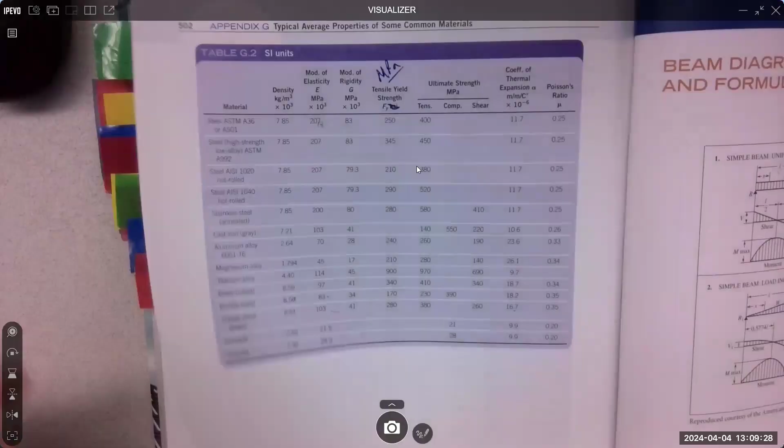There is SI units, don't mistake that, and then there's average properties of some common materials. And here they are, and there's concrete, and as Jorge said, there's 2 of them, but there's actually more than 2, there's 5 in total. There's 2 very common ones. And notice you won't get all the properties of concrete. What table is that? This is on page 502, average properties of some common materials.

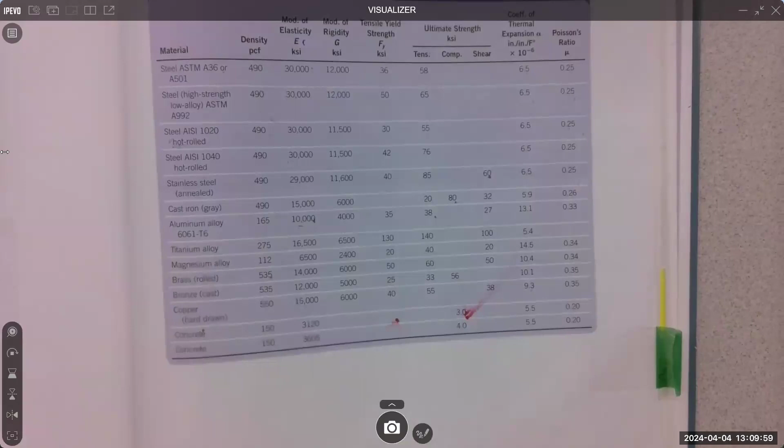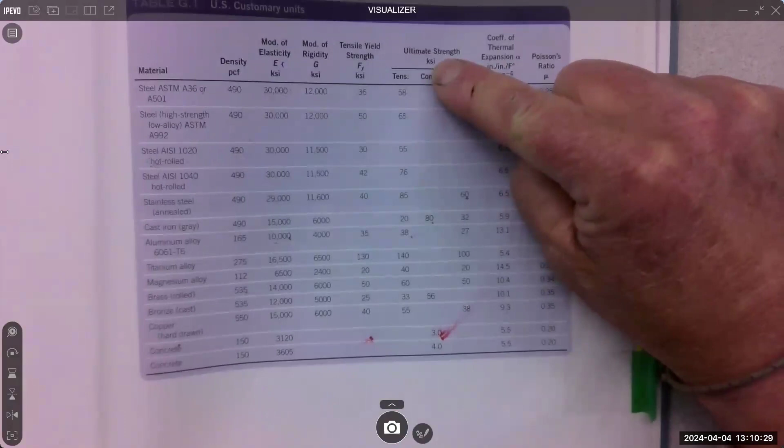The blood? No, it's highlighter. I don't think I'm bleeding yet today, but I bleed daily because that's just what I do.

Because I work with my hands, because working with your hands is good for your brain, just so you know. It can be on your truck, it can be on your car, it can be in your garden. I build, right? I'm building a golf platform for my dad.

Is there any proof to that, or is that just a saying? No, there's actually research that's proven. So you know who wrote the research? This is fascinating. A mechanical engineering PhD went out, worked 5 years in research, but was a motorcycle enthusiast, and finally gave up the PhD research to work with his hands and have a Harley Davidson shop. So he did research on how many people migrated from a high tech to a low hands-on type of job and what their rating on happiness was. He literally proved through some research, with statistics, which is always flaky, that you can be much happier if you find something you're super passionate about, but working with your hands is definitely beneficial.

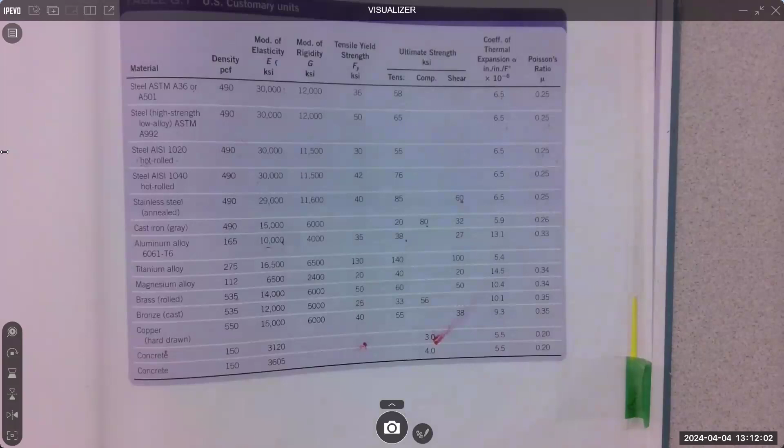I worked about 15 years as an aviation technician, and 20 plus on and off as a machinist. And I still have my 8 fingers, and my 2 thumbs. I haven't taken off a finger yet. All right, so anyway, back on task. Because I'm a machinist, they cut themselves. That's not blood, not blood, it's highlighter.

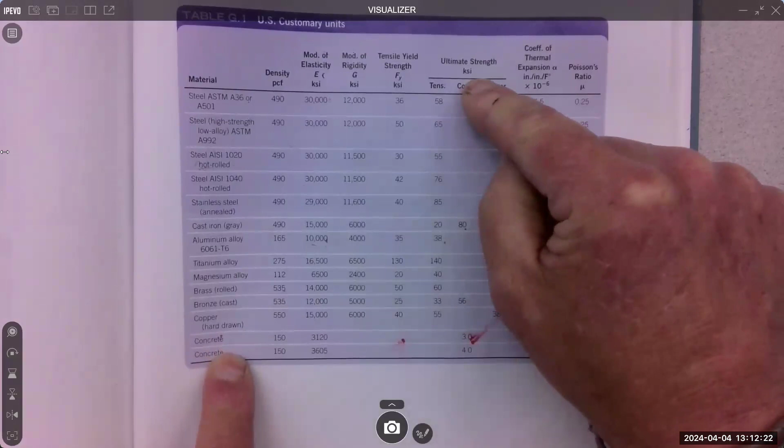But see, ultimate strength, standard concrete is 3 KSI. How much did you come up with? 4 KSI, so right at the limit of high strength concrete. But it'll hold, that's a lot of weight on a concrete cylinder, I think it was 6-inch, right? Yes, that is a lot of weight. Concrete's amazingly strong. All right, anyone else get 4 KSI? Yeah, okay.

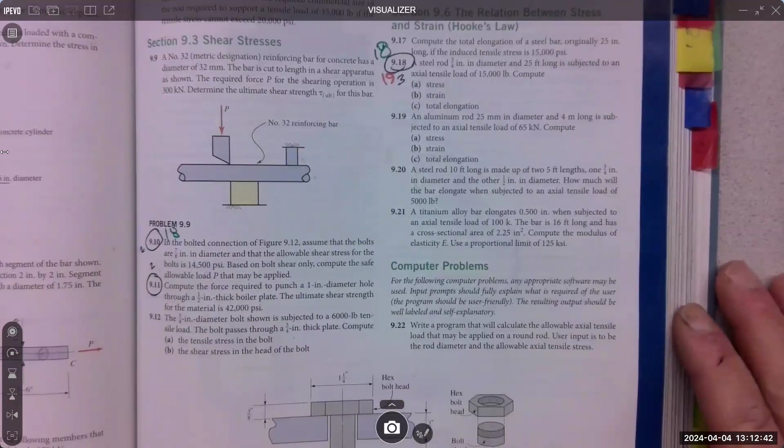What's this one called? BC. What'd you get in BC? 31.18 KSI. Anybody else? Yeah? And then what about in AB? 18.75 KSI. Yeah, and did they give us the material?

Looks terrible. They didn't give us material, so we can't check it. Then we're just calculating a stress for some academic purpose, and I despise that. I wish they would give us materials on everything, because then we could say, oh, that's a good stressor.

Oops, that's not gonna work. Okay, next one, they give us a steel bar. What type of steel? That's gonna be mild steel, but that's a great comment.

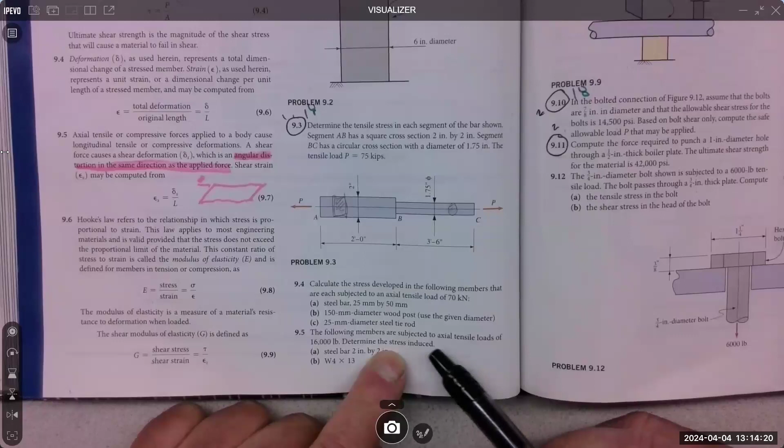So number 5, the following members are subject to actual axial tensile loads. Axial load, what's that mean? In line with the long axis. So we will do bi-axial stress, which means two axis. One will be axial, like that, and the other would be cross-section, or bi-axis.

Steel bar 25 by 50, and then a wood post, and then a steel tie rod. Wait, that's number 4. Darn, I like that one. I should do 4 next time.

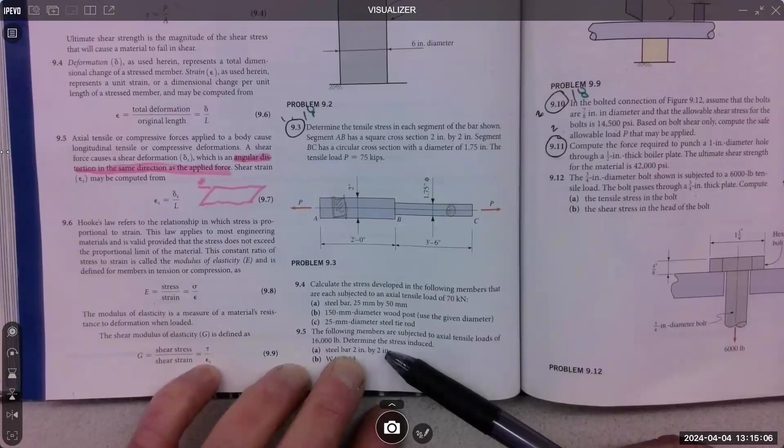Steel bar 2 by 2. What was that one? 4,000? Yep. Anyone remember the yield of mild steel? 36,000. So mild steel is called A36, and that stands for 36,000 yield. So if you're getting 4,000, we're like 9 times under the limit. That's good. What about the W4 by 13?

How'd you get the area? Look it up through the table. Yeah, go to the table, look it up. Nick said a different answer. It was close though. Okay, 4,000, perfect.

And W shapes are steel, typically mild steel, but they can be different steels. So if we don't know, like on a quiz, I'm going to tell you the material so you'll be able to compare it right away. But if the book doesn't tell you a specific kind of steel, then we just assume A36.

Question on the table itself, on the soft steel - it's also A36, but it said A501, what's that mean? So that 501 is another type of mild steel. It just has a different carbon content, but the same material properties. It might have different corrosion resistance, a little different surface finish, that kind of thing. But the properties are the same.

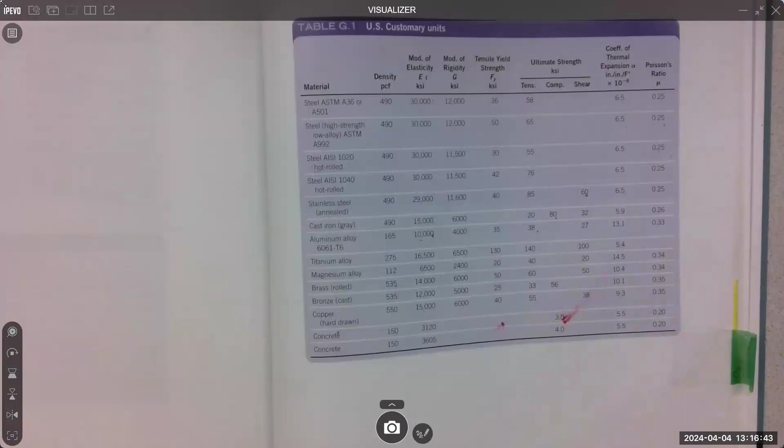And I think they give you high strength, yeah, and they give you stainless. They give you 1040, that's hot rolled. So those are the common steels that get used out there. And of course, there's a lot more - you can get any kind of steel you want.

All right, let's push forward. Wow, chapter 18, that's really pushing forward. Let's go back to chapter 9. All right, just a quick review.

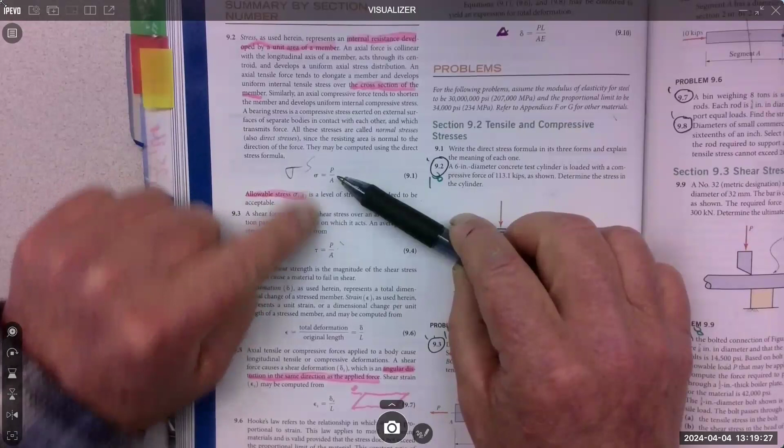Our stress equation, P over A. This is all kinds of tensile stresses, also called normal stresses or axial stresses. And then shear. We haven't done any work in shear yet, but you're gonna have a homework set in shear. Oh, I should show you that because it's a little deceiving, maybe confusing.

Let me look at it. Where does it say? Yeah, here's where you're gonna do it as a homework set, and it says in the bolted connection of figure 9.12. Figure 9.12 is in the chapter. You gotta go looking for it. So it's not anywhere here.

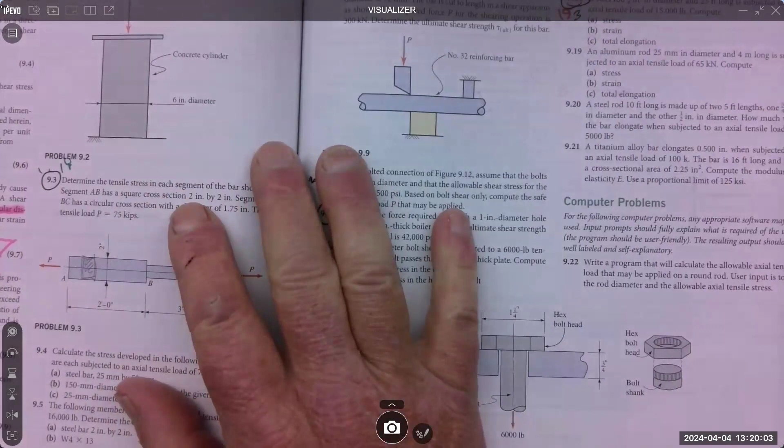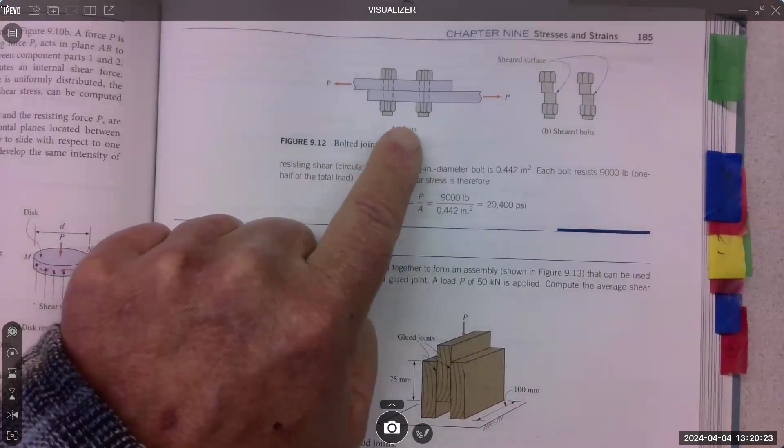Whenever they refer to a figure, that's like, oh, here's a figure, 9.21. Right, so we're looking for figure 9.12. Figure 9.14, figure 9.12 right here. So when the homework problem says go look at figure 9.12, that's figure 9.12.

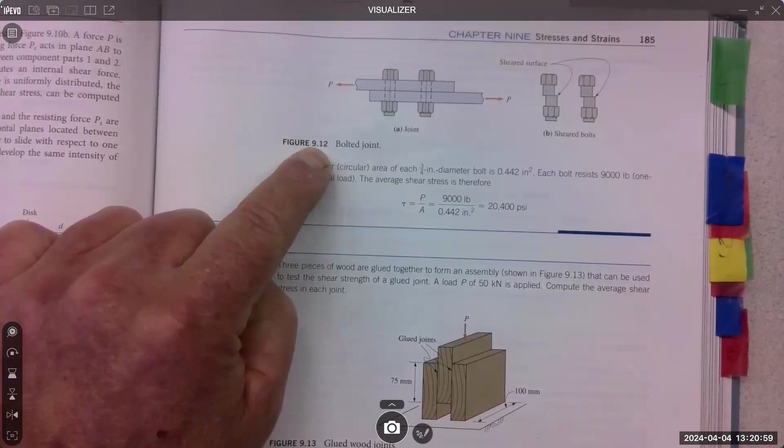Is yours different? What's yours say? Mine's right here. And that's figure 9.12? 9.12 up here, example. No, wait, no, no. Oh, you gotta find the one that says figure. Oh, I think that's it, go back a page. Yeah, that's why I'm showing you, because it's really weird. So when the book problem refers to a figure, you gotta go looking for it. Yeah, you're gonna need a picture of that, Ben.

So you're gonna do shear stress on this one, and they actually show you what we talked about last time. You have to think about what has to fail, and you have to use that area. So if it's a multiple bolted connection, every bolt's gotta fail. Like if it's a 10 bolt connection, all 10 bolts have to fail for this thing to be failed. So when you do your stress P over A, you're gonna include all the areas in shear.

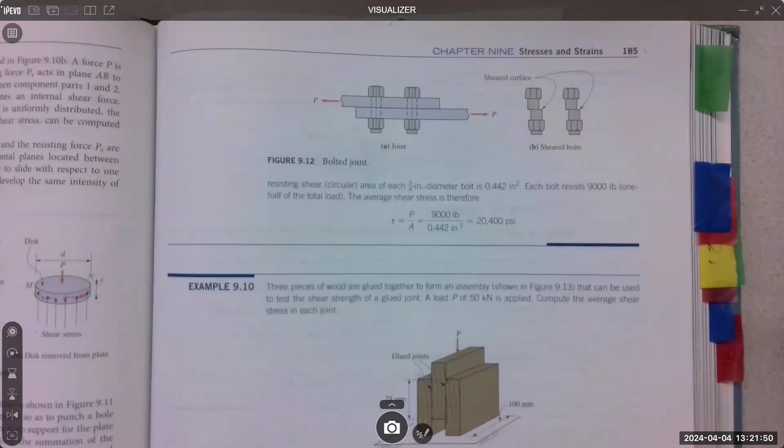So for this one, the plate, the bottom plate would go one way, the top plate would go the other, and it would have to take those two out. So you use the areas of those two bolts for your shear calculation. Okay, good, questions? I think you have a punch problem too.

So the problem with a punch problem is you have to again think about the area that's gonna fail. When you take a round punch and you send it through a material, you're trying to punch a hole, right? What has to fail? It's this outer ring that has to fail when you drive something through a piece of material. It's the circumference and it's the thickness of the material that has to fail. It's like a ring that you would put on a finger. It's that area. That makes sense?

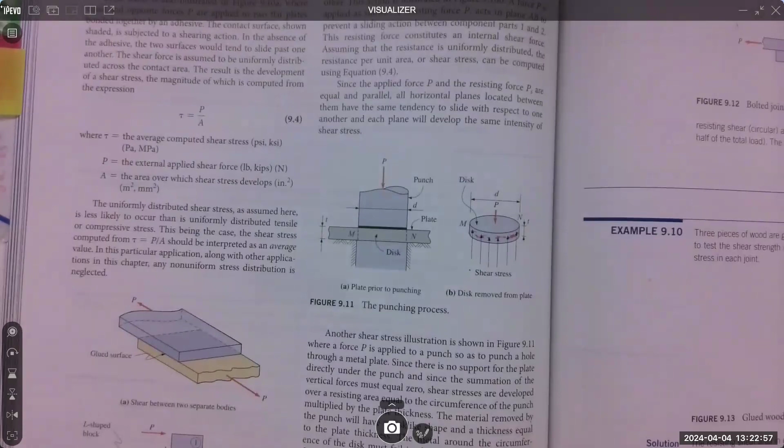Shear's a little different because you have to think about, oh, what area would fail, right? And in this case, with this punching down through this, it's this outer ring that would fail. So you have to calculate that. Circumference is 2 pi r times the thickness gives you the area. All right, good.

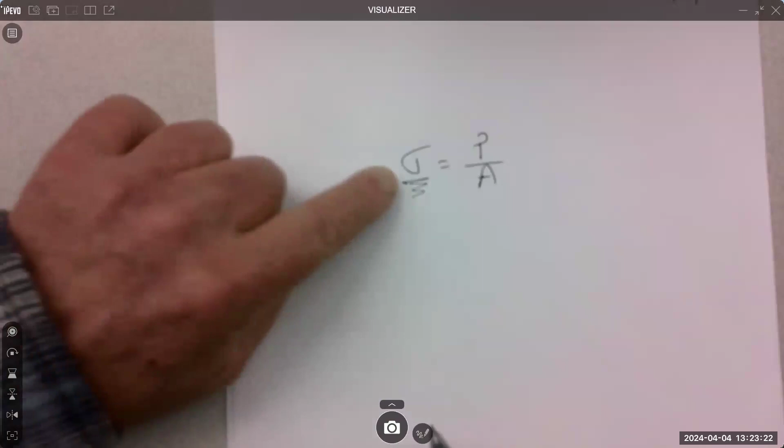Yes, it's this 11 one. And you're actually going to compute the force. So we did that last time too. If we have stress equal to P over A, and they give us a material property, they say, hey, this is steel, and it'll actually fail at 40,000 PSI, right? Then we know this.

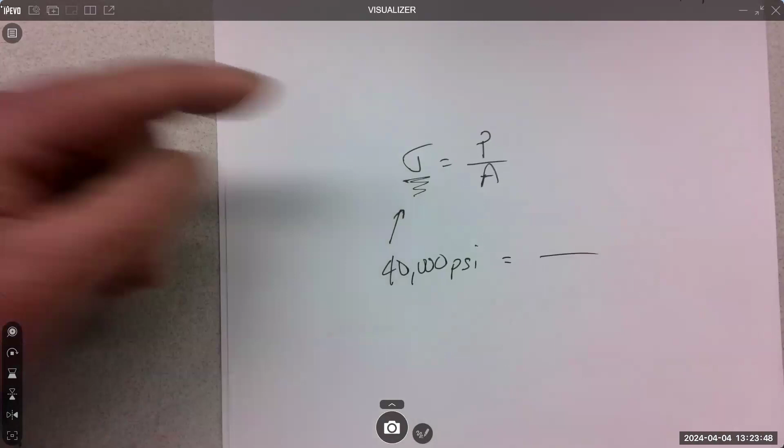So the problem says the material, we can look up the failure stress, or they give us the failure stress. And then they say the punch is this big, so then we know the area. What we don't know is P, if they ask for the load. So you can solve this equation 3 different ways for 3 different things. That's when this class gets complicated, because they're gonna just throw a lot of stuff at you, and then say, how much load can this carry?

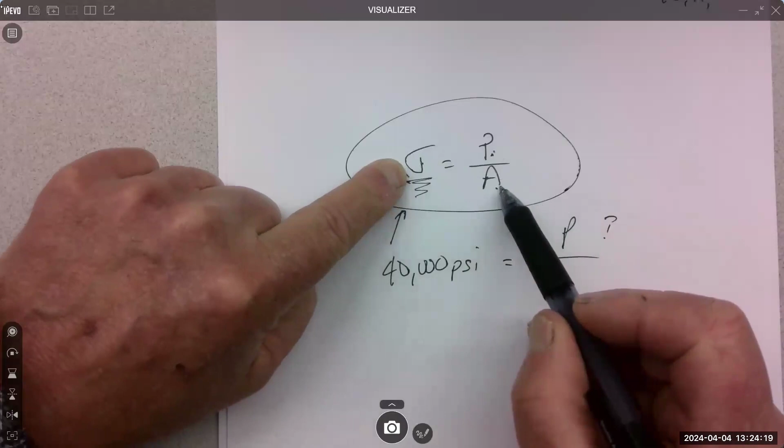And you have to go, oh, load's in this equation, right? Do I know the material? If I know the material, then I know the limit, I can look it up. And do I know the area that's gonna fail? Then I can calculate the load that would do it, right? So we don't just use it to calculate stress, we use it to calculate load, and we also use it to calculate area.

It seems like a super simple formula, but it does get confusing. You have to know what you're given, kind of have to understand what that is. If they say this material will fail at 40,000 PSI, that's a stress - that's the property of the material.

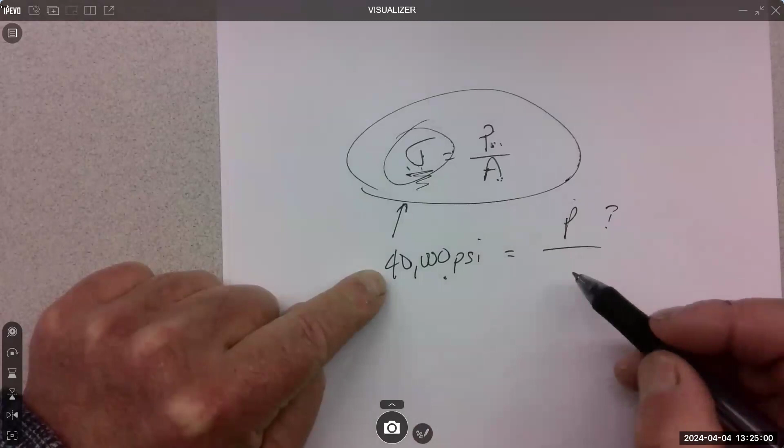In some cases, when they give you the material, they will give you the area also, right? Yeah, so that would be what we call an analysis problem. In other words, hey, here's the system - is it good or not? Is this gonna work? So if you're given the material and given the area, maybe asked about the load, then you're just analyzing the situation. It's not like you're trying to design.

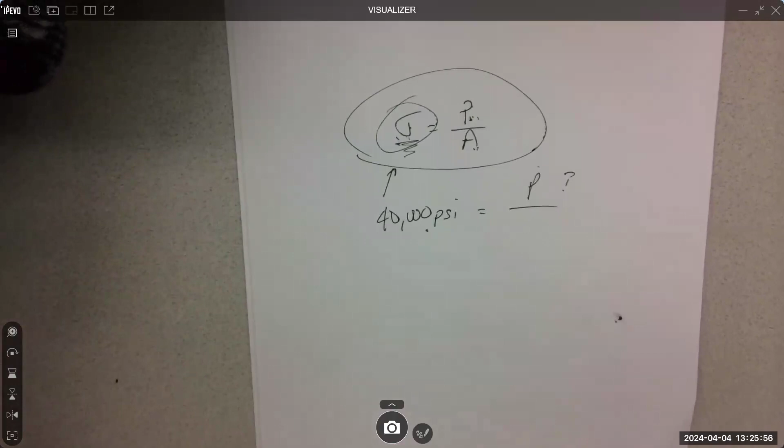Design would be, we don't know the area - how big of a thing do we need to put in there? Then area becomes the unknown. We're gonna have to know the load, and we're gonna have to know what material. So you have to know 2 of the 3 to solve for things. Gets tricky when we get into design, but we're not there. We're just still gonna hack out some stress.

All right, that's the homework set. This one you did. We're gonna do modulus elasticity today. We're gonna do strain, and that's probably gonna be enough, especially if we practice it a little bit.

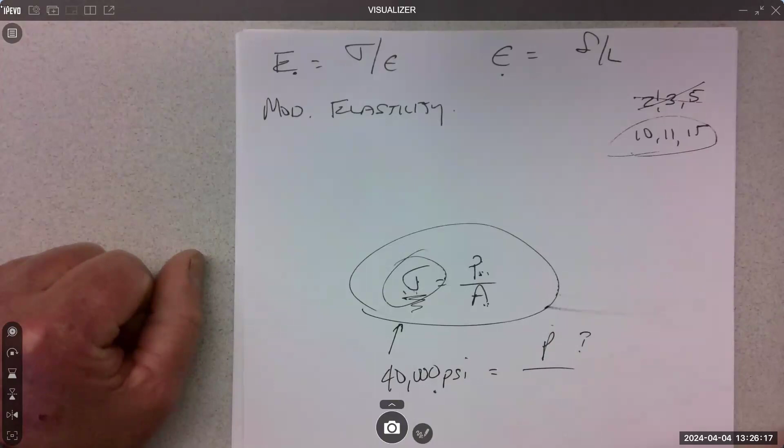So this we've got defined. We haven't had a lot of practice with it, but that's the stress, right? So we know stress is equal to P over A. I have to take you on a little bit of a journey to understand this modulus elasticity thing. I think they do it a little bit in the wrong order, because what I'm going to talk about is kind of chapter 10 stuff, but you have to have that concept to understand modulus elasticity.

This is a graph, the stress-strain graph. Stress, we know, is equal to load over area. We've done a couple stress calculations. So when we take something - I'm just going to draw our standard block thing, a square rod - and we pull on it. I don't know the size, maybe it's 1 by 1 steel, so it's pretty strong. We kind of played with that last time.

So the way the stress-strain graph gets developed is just like this. You take a test piece of a material, you load it in a tensilometer, and it pulls on it. It starts with 1 pound, and when you pull on anything at 1 pound, it changes its length. That's what strain is - a change in length.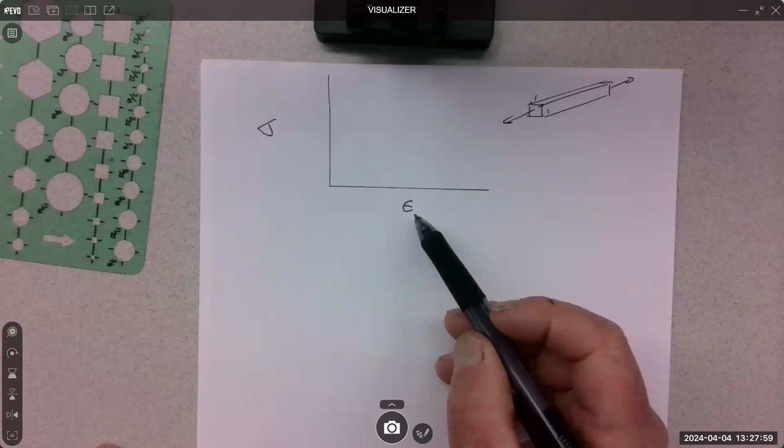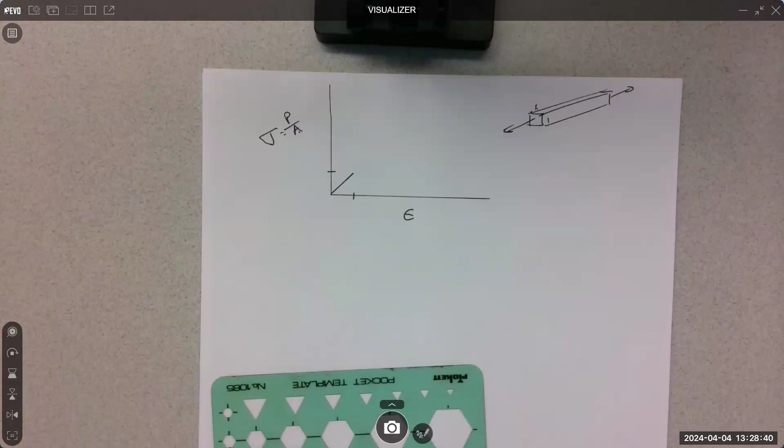As we increase the load, and since this is P over A and A doesn't change - it's 1 by 1 - really the only thing changing here is the load. As the load increases, the strain increases. So at 1 pound, it stretches a little. At 2 pounds, it stretches that exact same amount some more. At 3 pounds, that same amount again. At 4 pounds, that same amount again. It's a linear curve, a straight line in the beginning - we're not putting much load on there. When we get to 5,000 pounds, then maybe it's stretching a lot more, but it's still linear.

So this region of this straight line, where we increase load and we increase the stretch, is called the elastic region. If you let go of the load, it goes back to its shape. With steel, it's really small and very hard to see, but it's happening. A rubber band would be very easy to see - stretch it, 3 pounds, let go of it, goes back. That's the elastic region. A rubber band, you go far enough, it breaks - you've obviously gone past the elastic region.

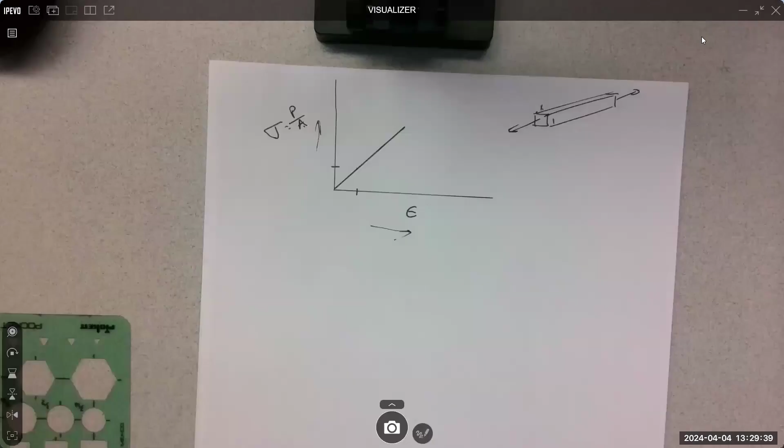Okay, we'll turn that on. So we want to stay in this region. And in this region, stress and strain - remember this is strain, this is stress - they're equivalent to each other. There's a relationship between them. That relationship is called the modulus of elasticity, and we refer to it as E.

I think that's an epsilon - that's a Greek lowercase e, epsilon. So the modulus of elasticity - there's a relationship between stress and strain and the modulus of elasticity. This is a material property.

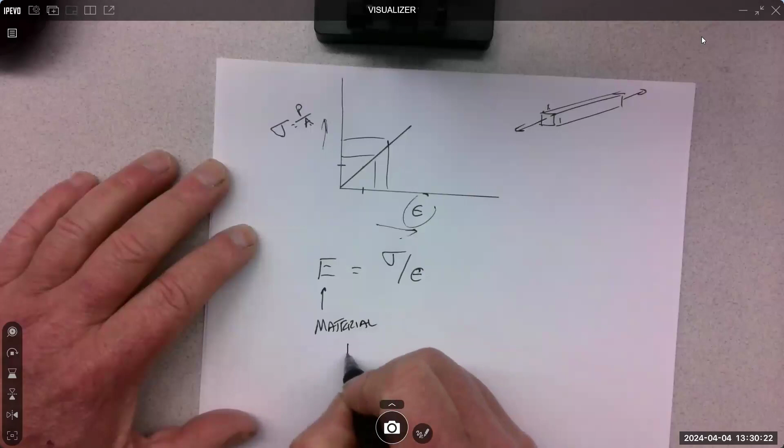In other words, E is going to be different for steel, it's going to be different for aluminum, it's going to be different for titanium, different for wood. We can look it up. So if we know the material, we know E - we can look it up. It's a material property, kind of like tensile stress for a material or yield stress for a material. You can look it up - it's different for all the different materials. It's in this table of common materials.

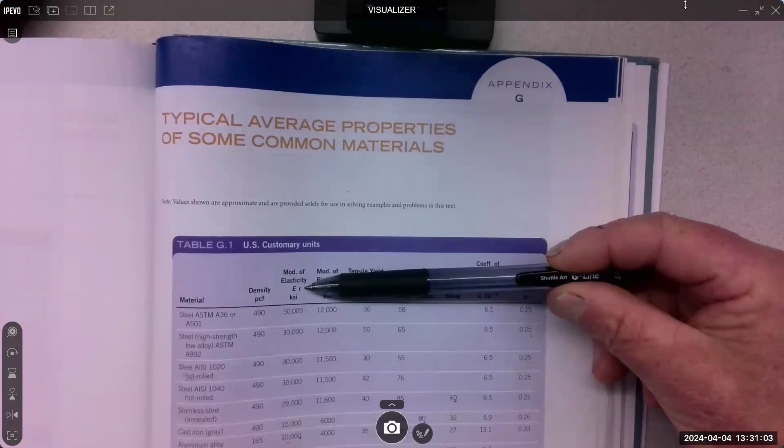And E is also here - modulus of elasticity. For steel, the modulus of elasticity is what? For mild steel...

Mild steel's here. Here's modulus of elasticity. It's how much? 30,000 KSI. Got to really sink this in, because that's 30 million PSI.

Okay, yeah, it is. Sorry, 30,000 KSI. K stands for 1,000. So it's really 30 million PSI.

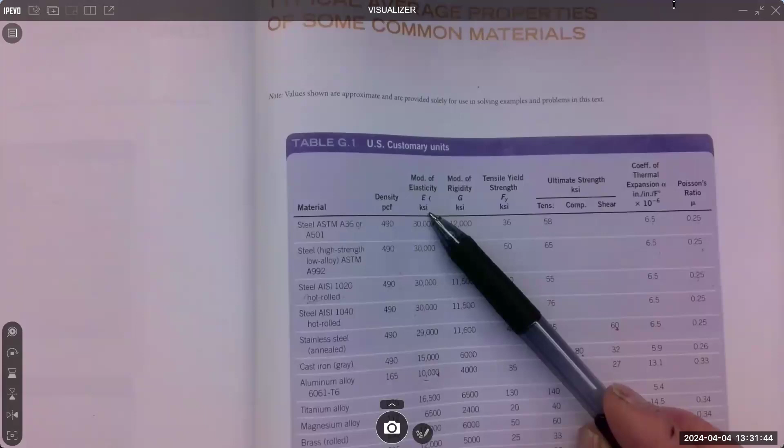Modulus of elasticity is a big darn number. Yield strength, we've talked about that, is 36 KSI, 36,000 for that same material. So the stress is much different than the modulus of elasticity.

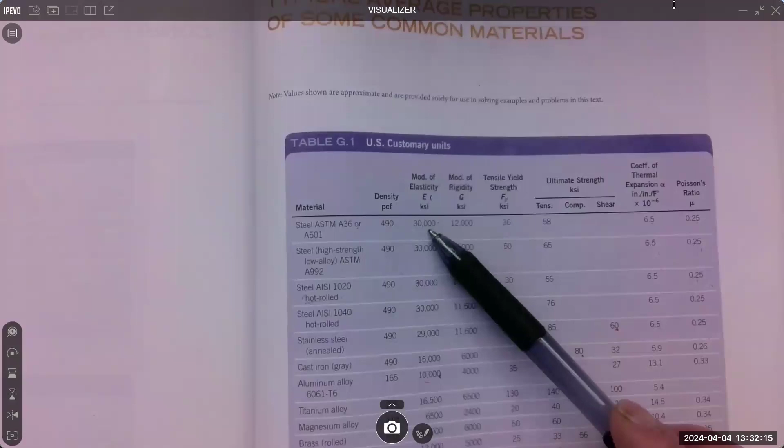Basically the same ratio as kips versus pounds - 1,000 pounds, right? Yeah, kips is 1,000, exactly. So you just add 3 zeros to that number to get PSI. Sometimes you'll need PSI, sometimes you won't.

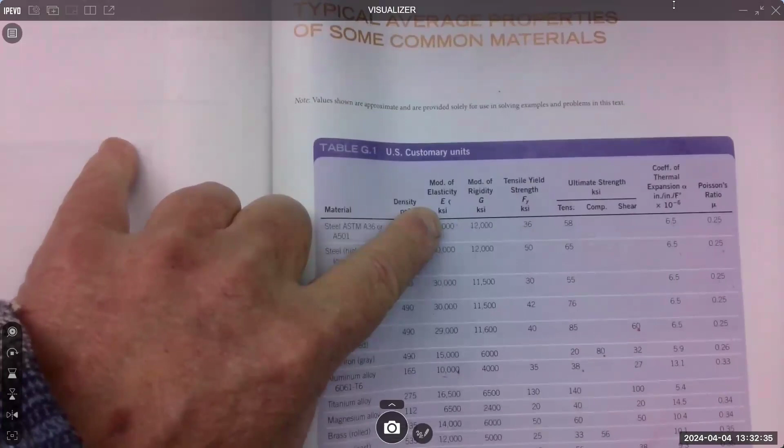You can use KSI. So if your load comes to you in kips, then you can just use KSI because you have kips in the system. If your load comes to you in pounds and you're using modulus of elasticity in KSI, then you need to get it to PSI, pounds per square inch. And that's 30 million.

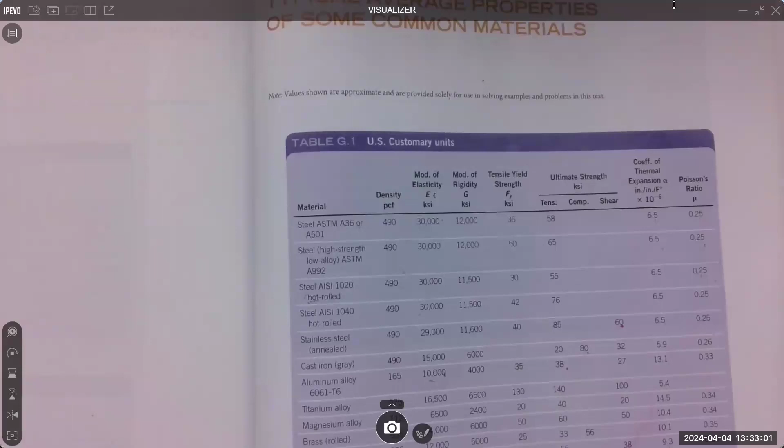So the modulus of elasticity is this relationship between load and stretch. That's what you need to wrap your head around - everything that gets loaded will deform. And if we want to know how much it deforms, which we do as engineers, we want to know how much this is going to deform. We don't want it to deform so much that the cylinder ring expands and welds to the cylinder wall. We don't want that to happen, right?

So we need to know the elasticity of the ring material. We need to know temperature - temperature is a big thing in pistons, and we're not doing temperature yet, but we will do temperature here. Right now we're just doing load.

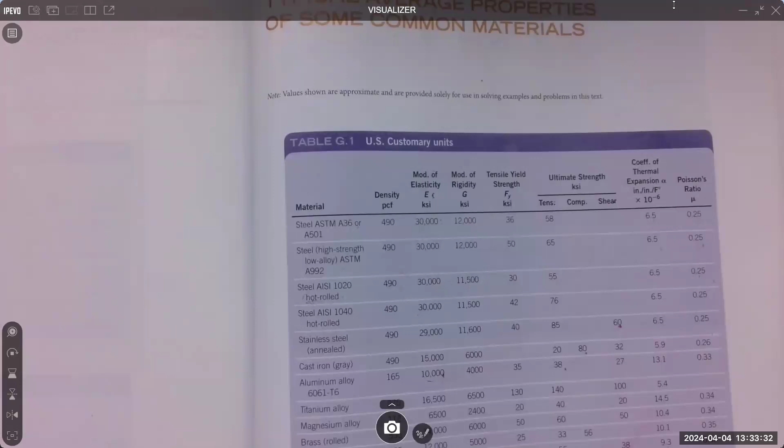So maybe the cam or the piston rod is being loaded by the explosion of the fuel, right? And that piston rod cannot deform too much. If it does, we're going to have all kinds of problems. So we calculate this stuff all the time as far as deflection goes.

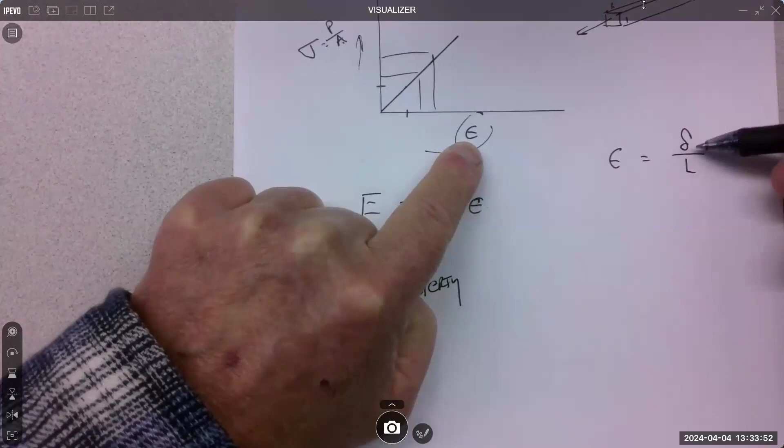And E is what does it for us, because it's the relationship between this load and strain. Well, strain is defined as delta over L - that's a Greek lowercase d - and that is the change, the change in length. So when we pull on this...

I'm going to pull on it with 4,000 pounds. And it's 1 by 1, and we'll make it A36, which is just mild steel. So when we pull on it with 4,000 pounds, it changes length. That happens. And if we want to figure that out, we have to use this equation and the modulus of elasticity to figure it out.

This is deflection, how much it changes. L is the original length. So we would need to know that this thing is 30 inches long - the original length.

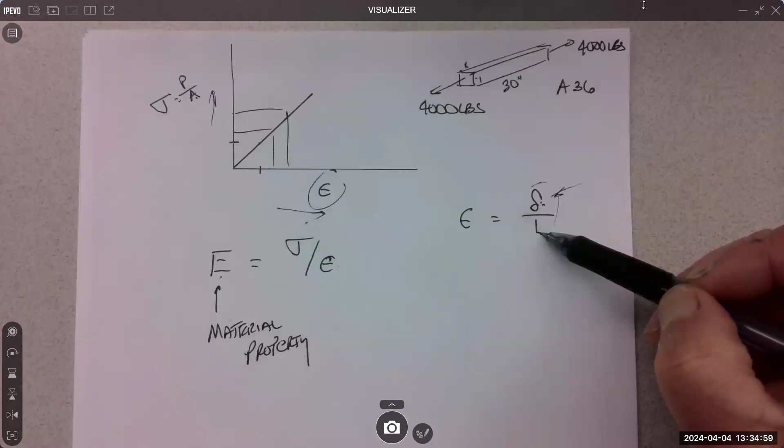All right, so strain, stress, modulus of elasticity. Anytime you're going to calculate a deflection or how much something changes, we can only calculate that in the elastic region. If we're outside of the elastic region, it's not predictable. We can't calculate it - I mean, we can calculate it, but our number's not valid.

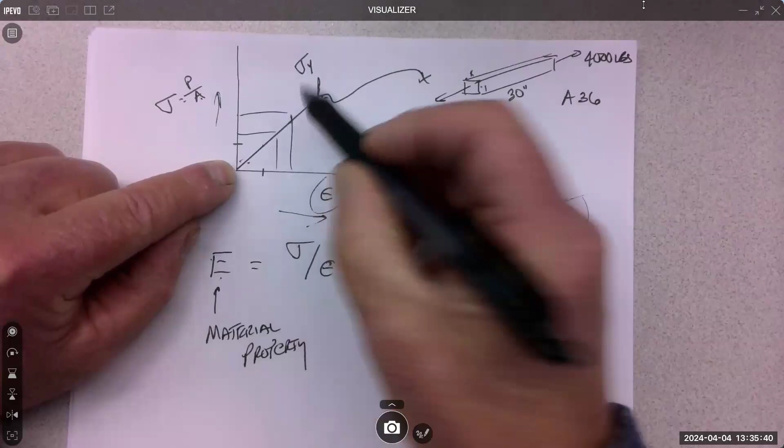So that means we need to know - here's the whole curve. We need to know here, this is the yield stress. We need to know that our stress is in this elastic region before we try to calculate a deflection. If it's outside the elastic region, we can't calculate it - it's not valid. So the first thing to do when you're trying to calculate a deflection or how much something changes is you've got to calculate the stress.

And we've done that. What's the equation for stress? P over A. You can answer that for any time I say stress - P over A, any kind of stress. So step one, when you're trying to figure out how much something stretches, is calculate the stress and make sure you're within the elastic region.

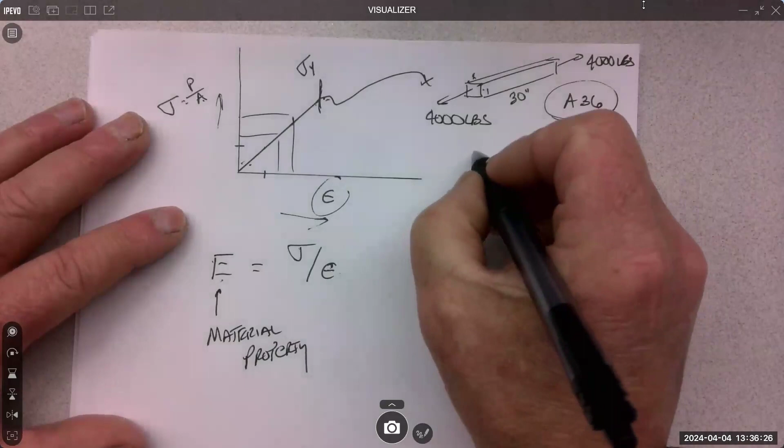This is A36. If it's under 36,000 PSI, we're good. So how do we calculate stress? P over A. How much is our load? 4,000. And what's our area? 1 times 1, 1 inch squared, right?

Oh, I put it here. How much is my stress? 4,000 pounds, divided by 1 inch squared, keeping the numbers simple, right? So our stress is 4,000 PSI.

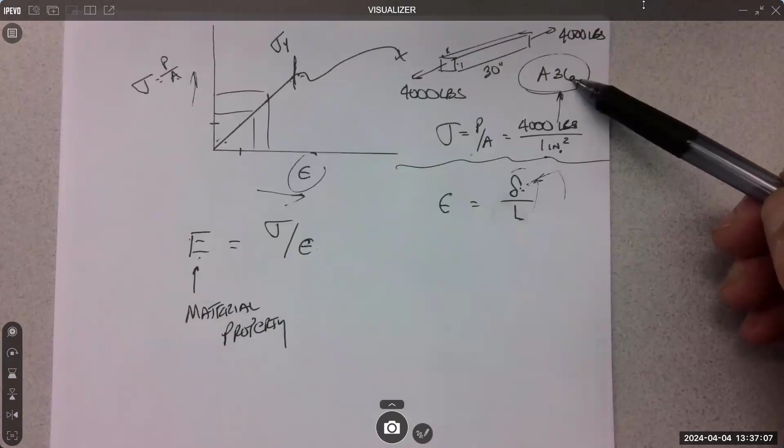The yield is 36,000. Are we within the elastic region? Yield is 36,000, yeah, we're way down here at 4,000. So this is our calculated tensile stress of 4,000 PSI. So on the graph, this mild steel graph, we're way down in the straight line region.

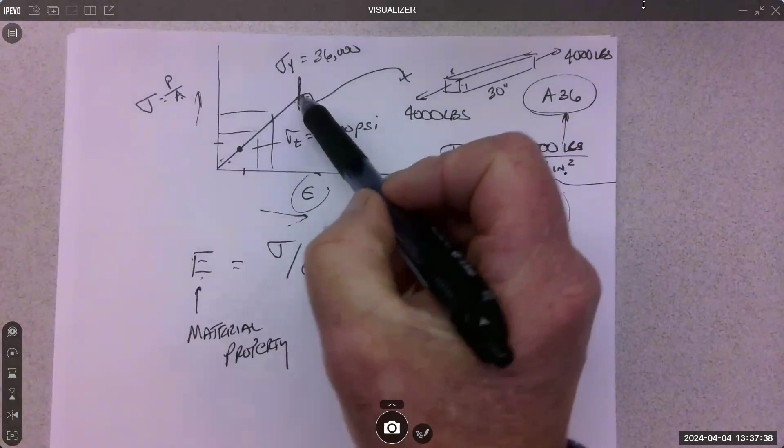Agreed? So this yield stress is where the end of the straight line is. And this is the elastic region, and this is the region we want to work in. But we need to check to see that we're in that region. When we're given numbers, that's the first thing we want to do, is check that. Once you learn that you are within the elastic region, then you can calculate a deflection.

Okay, 4,000 pounds, it's going to stretch some. We have to figure out how much.

The equation: E equals stress over strain. What does stress equal? What's the equation for stress? P over A. And then what's the equation for strain? Delta over L. This is like a term-long fundamental equation that we will just try to work on. The problem with this equation is there's 1, 2, 3, 4, 5 variables, and that means you could solve this equation for 5 different things. That's where it gets complicated.

What's delta over L? Delta over L is strain. Strain is here, stress over strain. Oh, okay. So I'm just breaking the formula down into the components. Stress equals P over A and strain equals delta over L. The book does this to develop the formula, but if you understand that concept of E equals stress over strain, and stress equals P over A, strain equals delta over L, then you can generate this equation anytime you need it, in any form you need it.

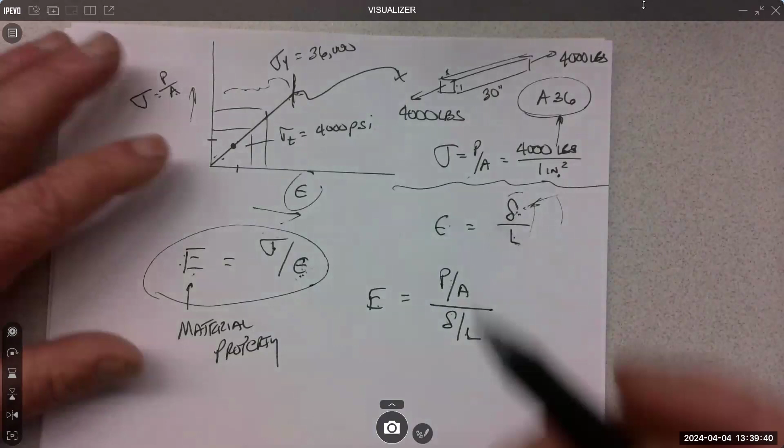What is delta? It's the amount of change. It's hard to draw, I'll exaggerate it. When we pull on this, this surface is actually going to move to here. That right there is delta. Does that make sense? It's the amount of change, and it's what we want to know typically. Like if someone says, okay, here's all the loading, how much does it deflect or how much does it change in size? It's like, oh, delta, that's what we want to know.

We measure that in American Standard. You can measure it, well, you can't always measure it. Sometimes you just calculate it, like we're just going to calculate it. But it'll come up in inches, depending on the unit you're working with. So if everything's in inches, you're going to get inches. If it's a metric problem, then you're going to get millimeters.

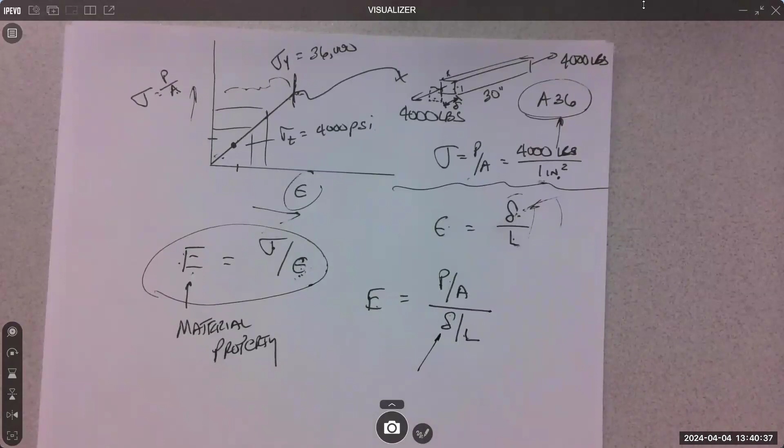So that means this is what we want to solve for, our delta, if we want to know how much it stretches. So then you just kind of go through it and you go, okay, do I know everything else? Do I know the load on our problem here? 4,000. Do I know the area? 1 inch squared. Do I know the original length? 30. Do I know E? I told you the material, so we can look it up. I know all the pieces, I just have to be able to do algebra.

30,000 - yep, 30,000 what? KSI. KSI, or 30 million PSI. Yep, so depending on what your unit is, we have pounds here, so that means we're probably going to need pounds in the E. Unless you change it to 4 kips, then you could use your 30,000 KSI, right? So...

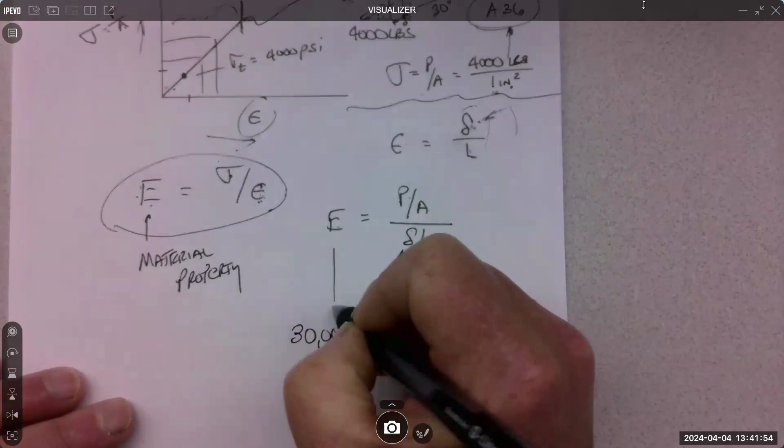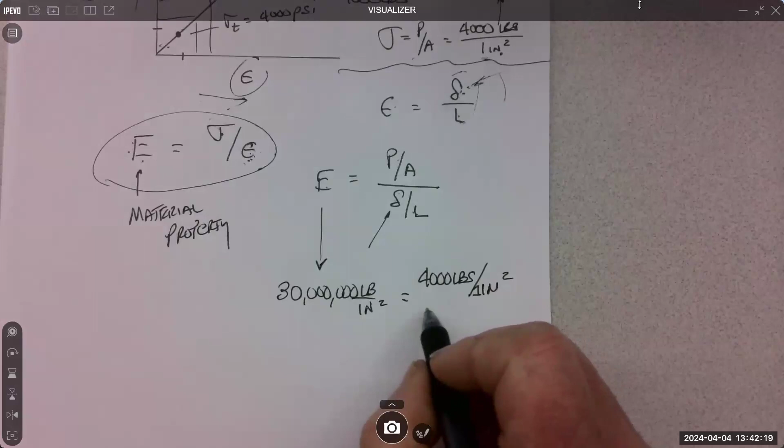Yeah, the equation solves out. We have to solve for this, so we can write it out in position. This is, I'm going to use 30 million pounds per inch squared, that's E. We just looked it up for mild steel. Equal to 4,000 pounds divided by 1 inch squared, that's my area because it was 1 by 1, over delta, what I want to know, and the original length of 30 inches.

Everyone know how to do the algebra to that? Not so bad, right?

The good news is it's so common that they give you the formula for delta. It's so common that we calculate this. It's really PL over AE. But that's just what we developed right here, this is the same thing. You just have to be able to do the algebra to get rid of this.

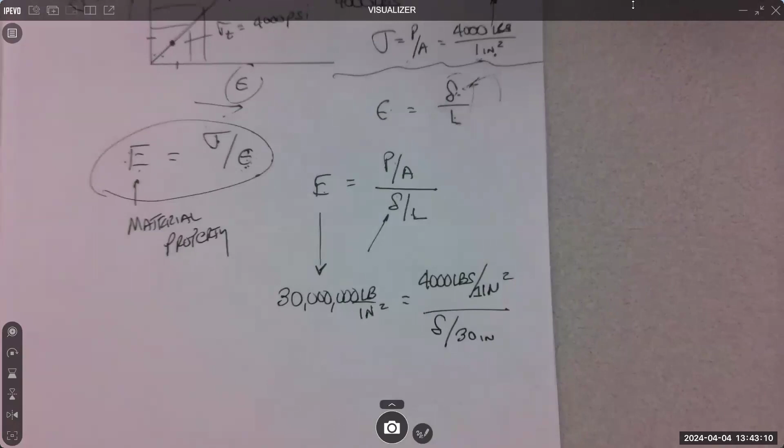All right, what do we get for... So the simplified version is delta equals PL over AE. So this turns into this when you solve for delta. So it's load times, because this flips up, this goes down, and then E comes over, delta goes over. So that's your algebra, they do it for you. But yeah, we need a number, calculate a number for me.

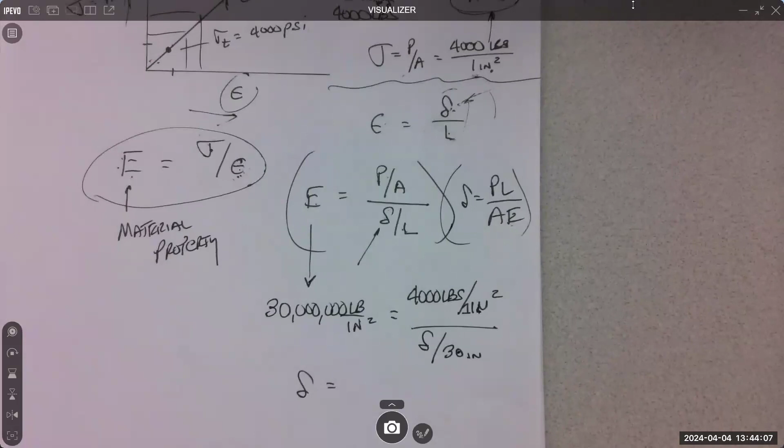It's mild steel, we're putting 4,000 pounds on it, but it probably doesn't stretch a whole lot. I would guess it's a pretty small number. Anybody got a number? 0.004? Anyone else get that?

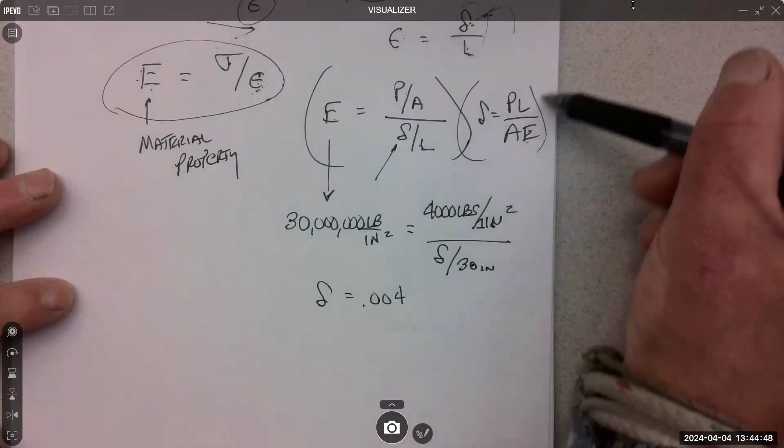Somebody confirm my number. So what are the units? If I think about this equation, the units are pounds times inches over area (inches squared), and E in pounds per inch squared, that's how I did the unit analysis. So this flips up, we have inches cubed on top, inches squared below.

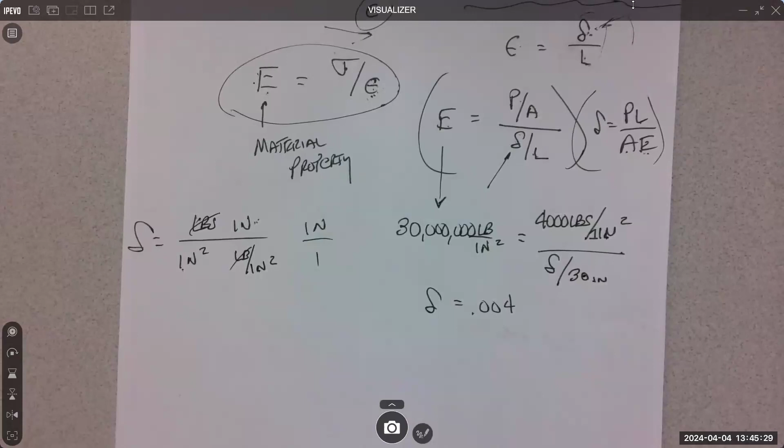We're left with inches above and nothing below because the pounds cross out. Which makes sense because delta should be the change in size, right? It's the inch change. 4 thousandths of an inch is how much it changes. 4,000 pounds on a 1 inch by 1 inch, I did this last time, that's my 1 inch by 1 inch.

And I hang two Honda CRVs from it. My Honda CRV is about 2,000 pounds, and it deflects that much, it's crazy. That's why we love it, doesn't deflect much. Now you raise the temperature 20 degrees and then that gets a lot longer.

That's like 10 times longer than that. So when we do thermal expansion, you'll be like, what? It expands that much? But yeah, it does. So we'll add all this stuff together towards the end of the term.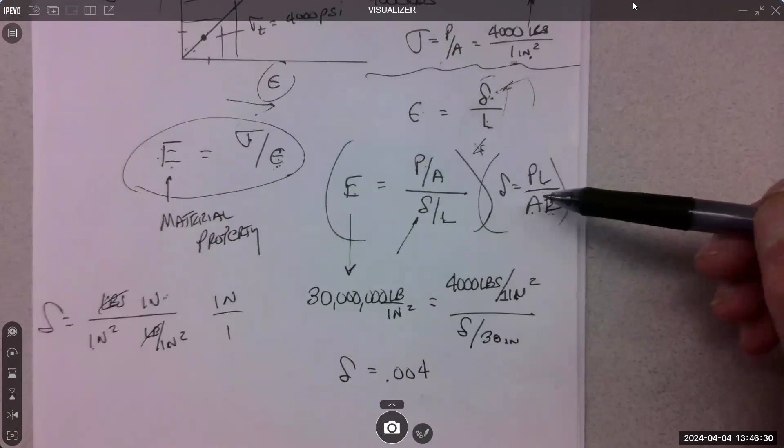All right, that was a lot. This is a very fundamental equation, we use it for a lot of stuff. So just think about the number of different ways we can run this equation. If we're given the deflection, and then we're given the area and the material, we could calculate a load.

If we knew how long it was, right? How much load would it take? So there's 5 different ways you can run that equation, 5 different word problems. It's like, this gets really crazy. But what you have to think about is, what do I know? What am I trying to find out?

The hard part for students is, if the problem starts with a wood beam, they just told you a whole bunch of information by saying this thing is wood. Because you can look up properties for wood, right? You can look up the yield stress, the bending stress, the modulus of elasticity, a lot of things. So as soon as it says the material is this, you know a lot.

I mean, there's different types of wood. Yeah, they would have to say - there's plywood, there's like - yeah, but they would have to say the type of wood, not just wood. You are correct, we talked about that on Tuesday.

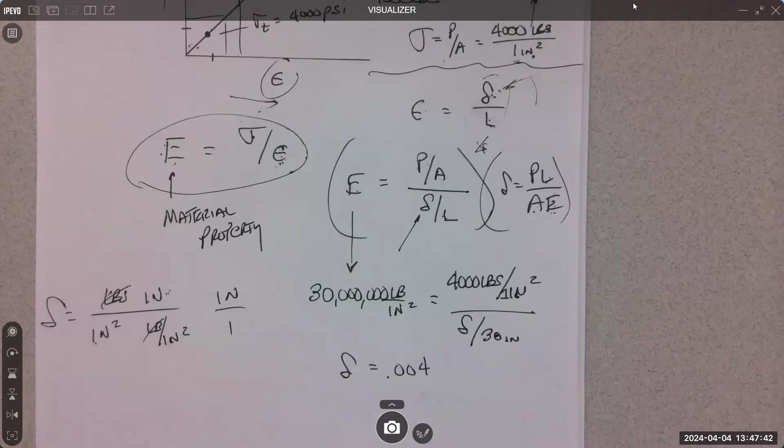And we don't have a lot of wood properties in here. I think you do have to be careful when you go online to look up properties, just make sure you're getting a good source. But these are the woods that we have: Doug fir, southern pine, hem fir, eastern white pine, and redwood.

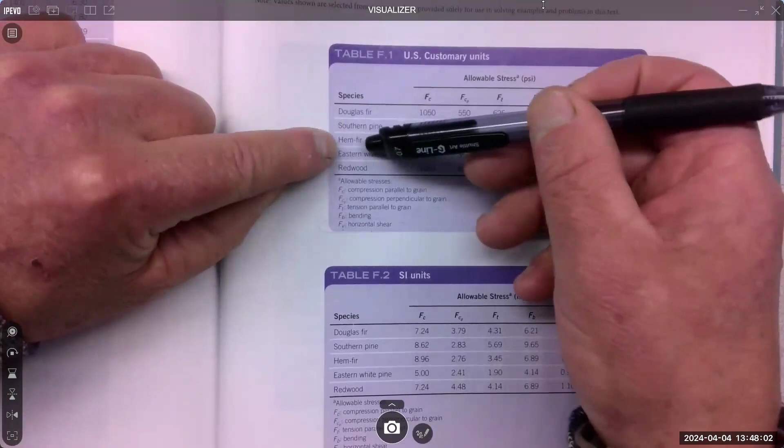But I've never heard of them. Yeah, exactly. So in our area, we're Douglas fir fans, we have a lot of Douglas fir lumber. And we are hem fir fans, we have a lot of hemlock fir combination. When you graft hemlock and fir together, it grows twice as fast as a Doug fir. That's why we like hem fir, we can make a lot of lumber fast compared to a Doug fir.

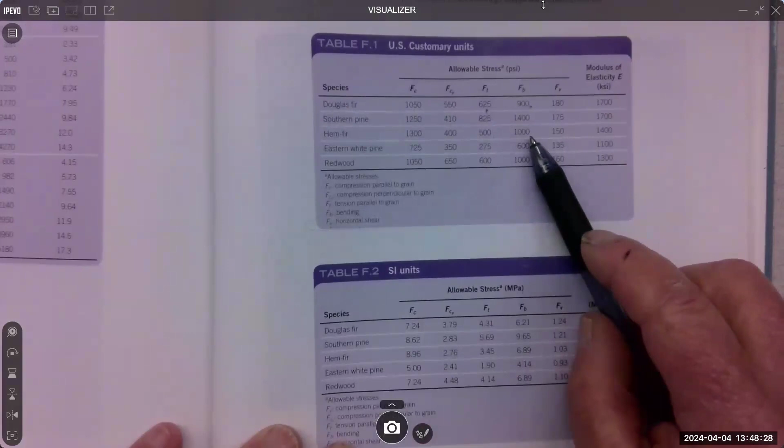Its properties are different, right? Because you combine the two. They're actually a little bit better than Doug fir. Doug fir is 900 in bending, hem fir is 1,000. And then in tensile, 500, a little worse, not as good as Doug fir in tensile. All right, good, good, good.

Let's practice this a little bit. What do you think? I think - how much time do we have? We have enough.

All right, so we're gonna take this cable, and it's a 1/4 inch diameter aluminum cable that is 40 inches long. So 40 inch, 1/4 inch is like your little finger diameter. I have fat fingers, so it's a little less than my little finger, but it's here, this is 1/4 inch. Now that's the diameter, 1/4 inch.

Not bigger. For the folks watching the video, there you go, 1/4 inch. I have a ruler, anyway. 40 inches long, right? And we're gonna hang 2,000 pounds, and we'd like to know how much it stretches.

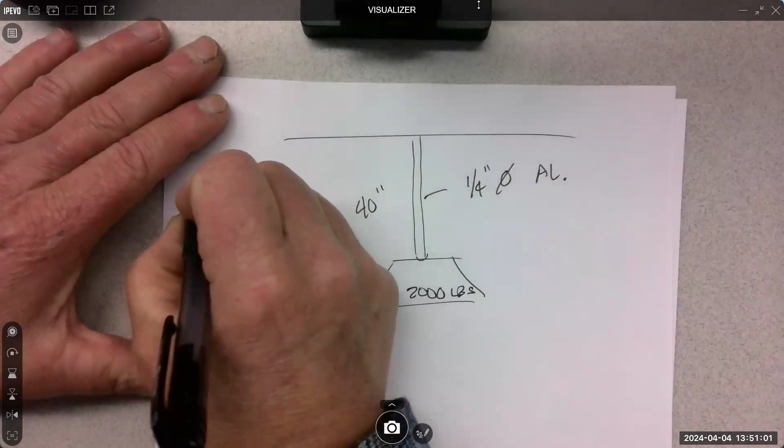It's a material property. 35 what? KSI? 35,000, anybody else want to verify? 35 KSI. All right, so yield is 35,000 PSI or 35 KSI, same thing, right? That's for aluminum.

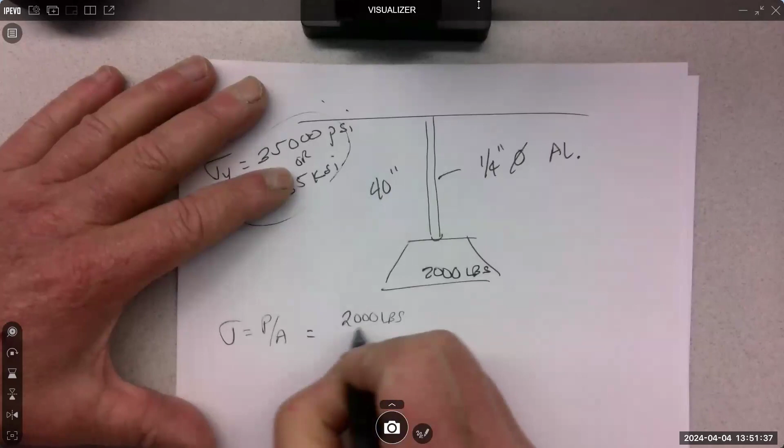Ready? Area of - could do pi r squared, which is 0.125 squared, an 1/8 inch squared, or you could do pi d squared over 4.

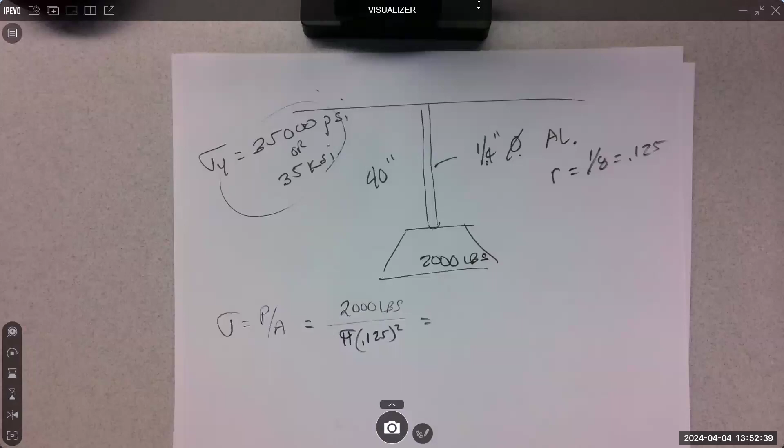For stress? Jorge, what do you get? I didn't do the whole thing yet - the area of the... don't forget pi. 2,000. It could be big.

40,743 PSI - pounds per inch squared. And then what does aluminum think of that? Not good, stop the problem. That's not within the elastic range. This thing actually just shredded itself. So even though the question asks how much did it stretch, the answer is it broke. It didn't stretch. That's why we check the stress right away.

The book doesn't do this to you - it's a happy, good world with the book. But I do this to you on quizzes and exams, because this is reality - you've got to check stresses first before you can calculate any kind of deflection.

All right, so we need to make a change so we can actually calculate a stretch. Let's make it twice as thick - a 1/2 inch in diameter. Now what's the stress?

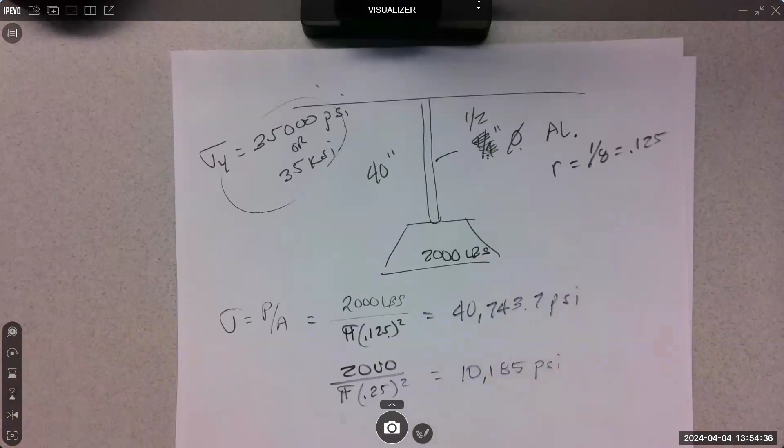PSI. And what does aluminum think of that? No problem - well under the 35,000. So that means for this diameter, we can actually calculate a stress, and we can calculate a deflection, how much it stretches, because we are within the elastic region.

It's predictable, so that means I can run this equation - PL over AE, our new equation. What's our load? 2,000. What's our length? Original, 40 inches.

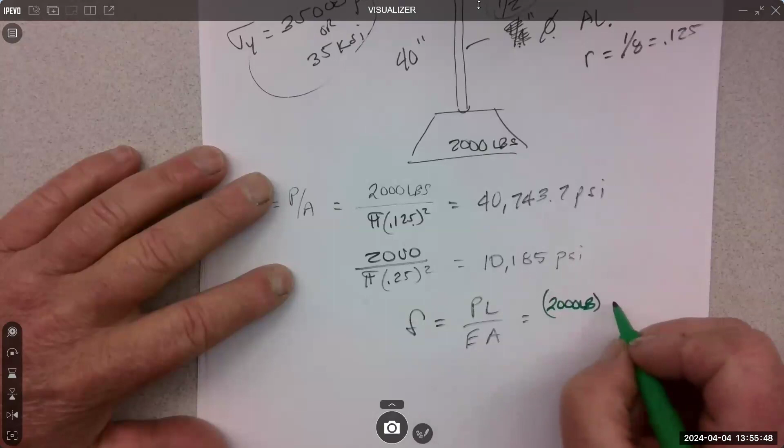What's our E value? We've got to look that one up for aluminum, right? 10,000 KSI. And then the area we can put in there. 2,000 pounds, 40 inches. E is, how much, Jorge? E is 10,000 KSI for aluminum. I'm gonna put in 10,000, 10 million pounds per inch squared.

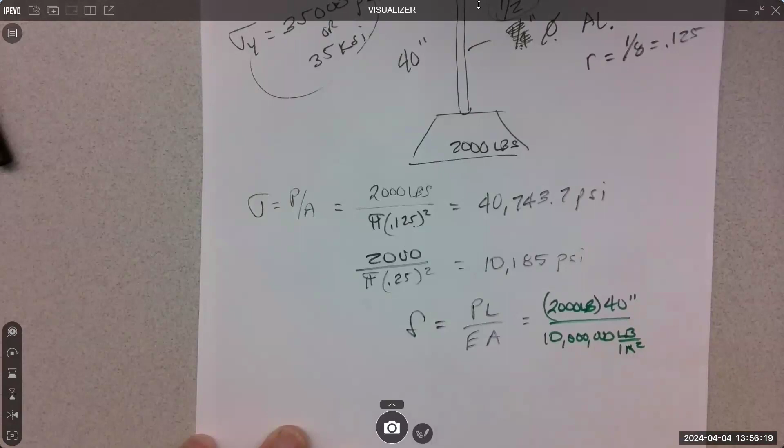And then what's our area? It's that area right there. So that's PL over AE.

Are we expecting a big number or a small number? Definitely a small number. How come I get 0.041? Did I do something wrong? 0.041 inches.

41 thousandths is how much it stretches. So when you're calculating these deltas, they're usually very small. But if you have a system where the clearances are 10 thousandths and you're looking at a stretch at 40 thousandths, you have a clearance problem. So we have to know how much these things deflect, especially in tight mechanical systems.

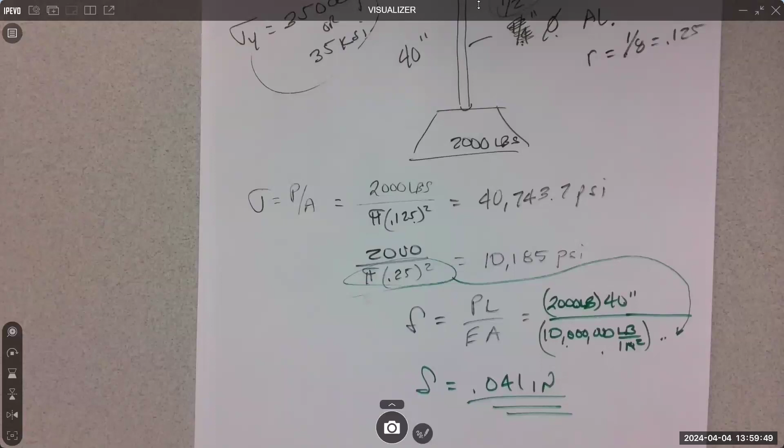We're still using grid paper, right? Green paper, yeah, grid paper - that's preferred, but there's some that are resistant to it. They're rebellious, I'm not gonna mention names or look at people. I prefer grid paper, but I'm not that much of a stickler about it.

And most of this stuff covers the material from the first homework, right? So it's sort of like - yeah, okay, that's fine, you'll be fine. All right, good job.